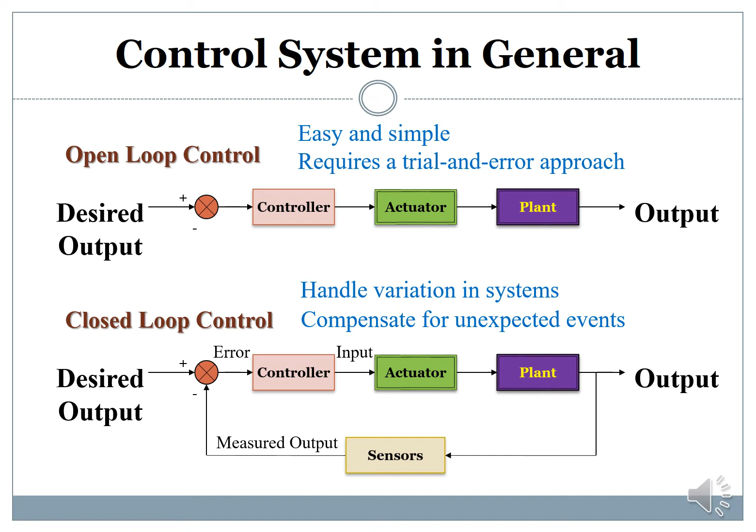In industrial electronics, systems are controlled by control circuits that consist of relays, contactors, and timers, which will affect how the actuator will behave based on the logical condition of the buttons and the switches. However, in recent years, programmable control systems have established themselves to an ever-increasing degree beside relay and contactor control systems, static switching systems, and process computers. Therefore, conventional control has been replaced by programmable control systems in many industrial sectors.

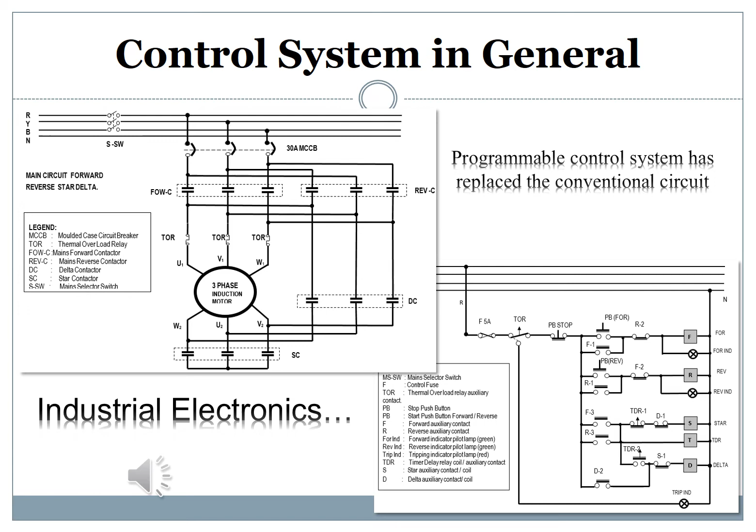The essential difference between programmable control and traditional control technology is that the functions are no longer determined by the wiring, but rather by the program. Programming is simplified to enable symbols that are familiar to the control engineer to be used in the program, symbols such as contact symbols or logic graphic symbols.

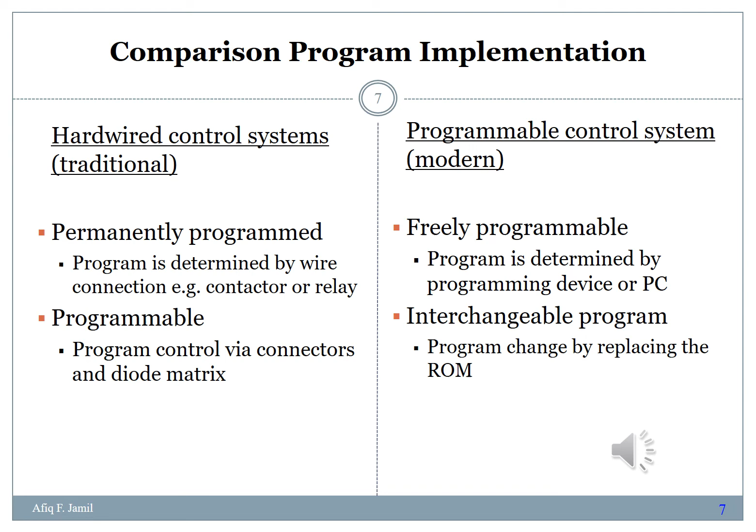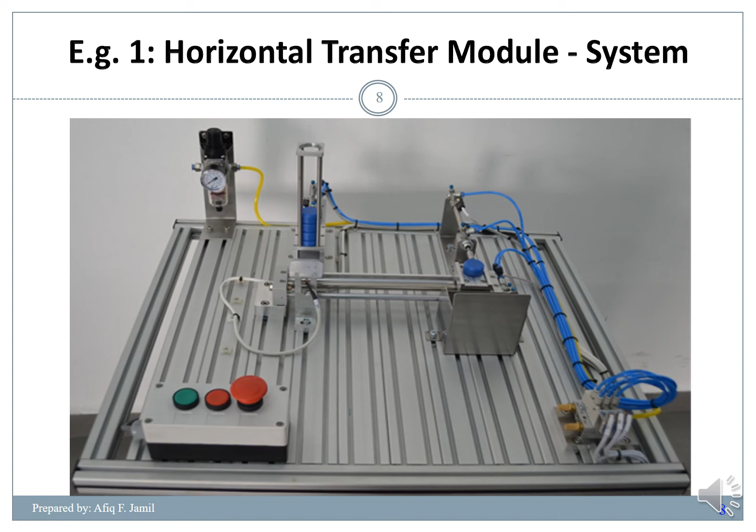This is an example of a hardwired system, a horizontal transfer module. This is available in GMI, in the Pneumatic Lab. So it's a simple system. It just wants to retrieve the blue parts from the chute and place them in the other box. If you look at the wiring, this system uses the hardwire method. You can see there are a lot of relays and there are 3 timers. So the timers, the relays, the sensors and the solenoid valve are connected, or programmed, based on the connection of the wires.

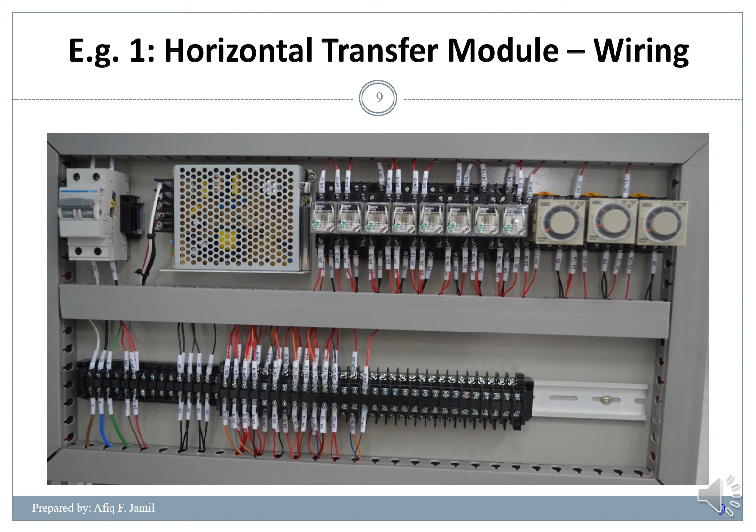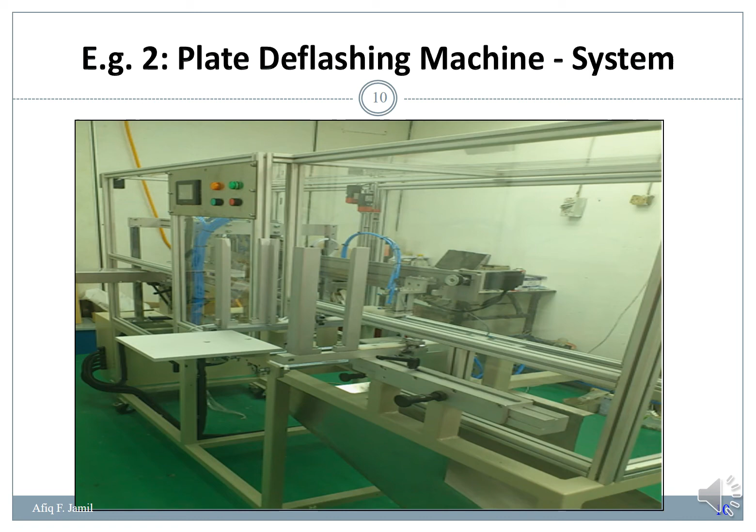Example number 2, this example is for a modern control system using PLC. As you can see, this is a complex system, a big system. If you look at the wiring, you cannot see any more timers or relays. All of those devices are now embedded in the PLC, so we just use the PLC to program the system.

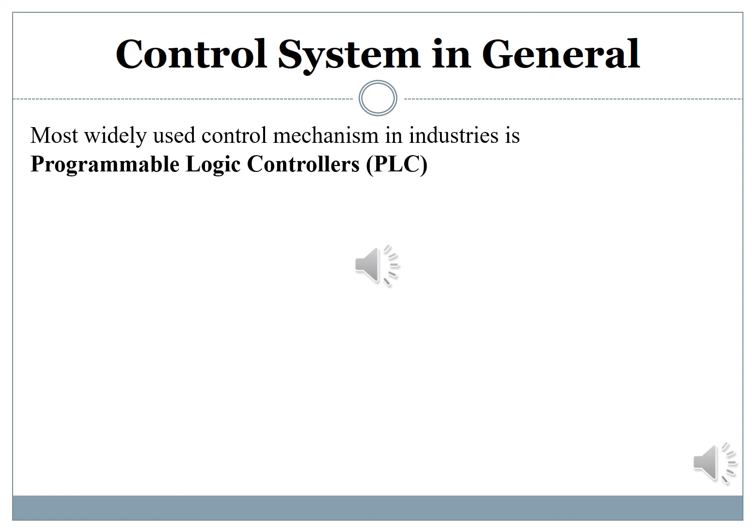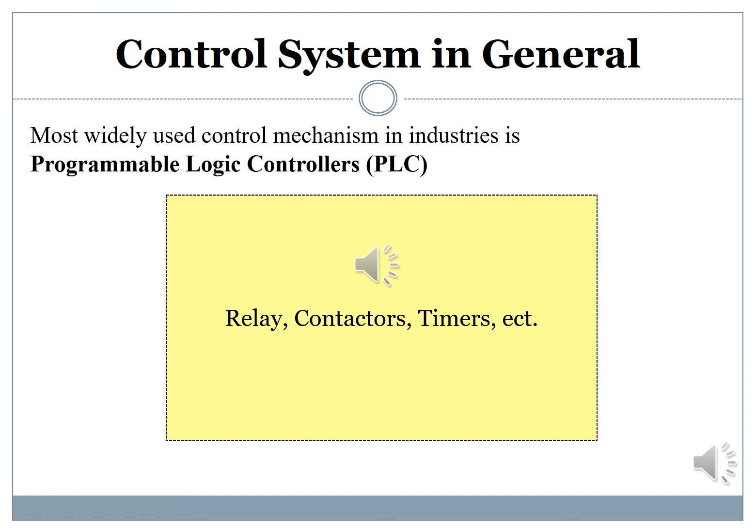As a result of their adaptability and reliability, PLCs are by far the most common control mechanism used by manufacturing businesses of all sizes. The compact physical structure of PLCs significantly reduced the space taken by previous physical components such as relays, contactors, and timers. Instead of building a large mechanical setup of components to control a process, the same components could be dragged and dropped in a computer interface, saving setup costs and time as well as long-term maintenance.

The software language created for PLCs, called ladder logic, retained a very similar look to the wiring diagrams that were used for the physical components it replaced. This software design was intentional as it enabled technicians to quickly understand and update the logic as changes were needed with minimal additional training.

In addition, ladder logic and other PLC-based programming languages offer a graphical real-time visualization of program and machine operation, unlike most compiled languages. This could aid in system troubleshooting. As a result, control engineers have a platform that is easy to read, easy for maintenance technicians to troubleshoot, and usually allows runtime modification, all with higher reliability than the mechanical analogs.